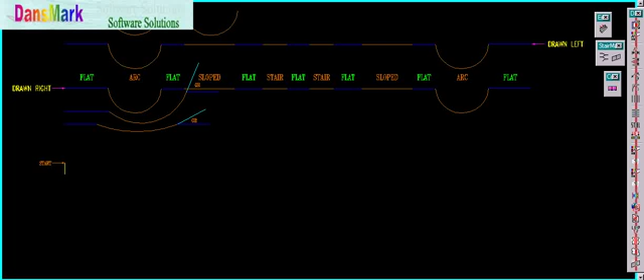This is an updated video of my new program called the New Millennium Railings. If you haven't seen the other videos, this is a spin-off of my custom railing designer and my slope railing designer. I've combined those two together and made it even more powerful than those.

So you'll be able to draw flat, arced, sloped, and stair railings in any combination. You'll also be able to do calculations for your slopes and stairs. You can pick a drawing - in other words, someone sends you a drawing, you can actually pick off of that drawing to get your rise and run from that.

On your stair portion of the program, you'll be able to place your pickets on the treads if you wanted to. You'll be able to put your pickets on the stringer edge, on a concrete edge, or on the tread itself, and you'll be able to control where on that tread you want it - in the middle, 2 inches off the very end nosing of the tread, 3 inches off. Whatever it is that you need, it will do it for you.

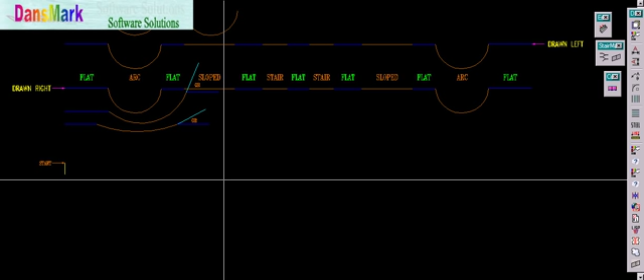Now, you'll be able to do any combination of flat, sloped, stair, and arced railings. I don't have the sloped arced railing done yet, or the stair arc railing done yet, but those I will be working on next. We'll start off with a flat, and I've already drawn these pieces out.

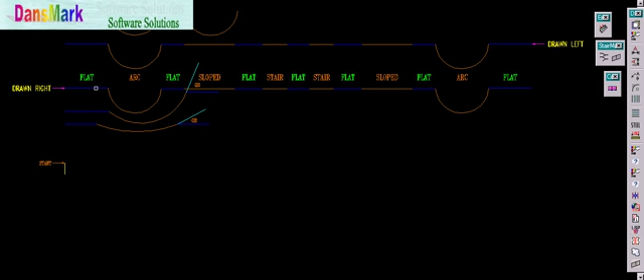So you'll be able to either enter a length or pick a line. If you draw your line from right to left, or from left to right, it's going to read that line data if that's what you want to do, or you can just enter the length of those in manually. We're going to draw this to the right. We're not going to put any dimensions on it. We're going to do another one.

And now we could either go towards me, towards you, from you, or continue straight. For this video, we're going to continue straight. The next one we're going to do is an arc. We're going to pick the arc.

We're going to do another one, continue, another flat one. Another, continue, slope. Now, it read the run from the slope. All you need to do is put in the rise.

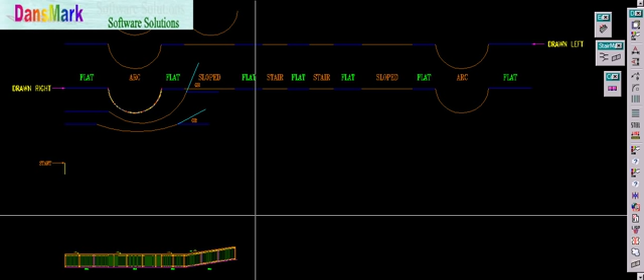And I will be creating a portion of the program that basically you'll be able to draw your plan views. I have the plan view portion of this turned off right now for the flat. I don't have the plan view done for the slopes and the stair, and that's the reason I turned it off, was just for the flat. But that will be fully functional, and you'll be able to draw your plan views out first if you want to, and then automatically do your erection and your shop drawings from that.

Let's go ahead and do another one. We're going to continue, and this is going to be flat. Another, continue, stair, and all we're going to do is either put a plus or minus because it reads the run from that line that we put in there.

And the designer, the plan view designer, will basically let you put in your rise and run and draw the line for the run portion of the calculation. You'll be able to calculate these stairs and slopes any way that you want. You just need to give me two of either A, B, C, or the angle AA or the angle BB - any two of those combinations.

And you'll be able to pick your stair information also. Let's do another one.

We'll do a flat, another stair - this time we're going to go negative. Another, continue, and flat. Another, continue, and sloped - this time we're going to put in minus 24 inches. Excuse me.

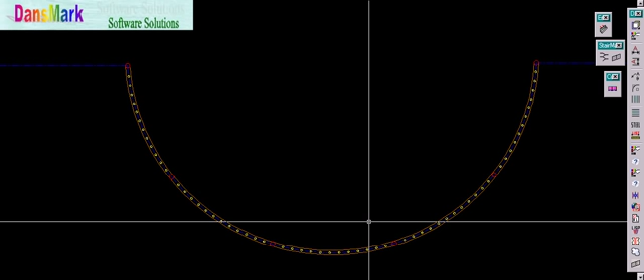Now let's go ahead and look at our arc railing for a moment. It basically lines up all your posts and pickets with the plan views. These plan views may look out of sync, but you hit regen, and it's based on your post maximum length, maximum post spacing, and maximum picket spacing. You'll be able to do any type of materials for post, pickets,

and picket rails. You'll have all the designers from the other two programs in this one. You'll also be able to set your layers, colors, and line types as defaults. And you'll be able to use your dimensions and text styles, so it'll look pretty much like your own drawings.

Now we're going to do another one. This time we'll go back to the left, just for this demo. We'll draw this about right there, and this one's going to go to the left. Another, continue, arc. Another, continue, flat. Another, continue, slope - we'll put in 24 inches for the rise.

Another, continue, a flat one again. Another, continue, and this time we're going to do a stair, drawing it positive - positive draws it upward, negative draws it downward. Another, continue, flat. Another, continue, a stair, this time drawn downward with a negative. Another, continue, flat again. Another, continue, slope - this time we'll put in negative 24, so it draws it downward.

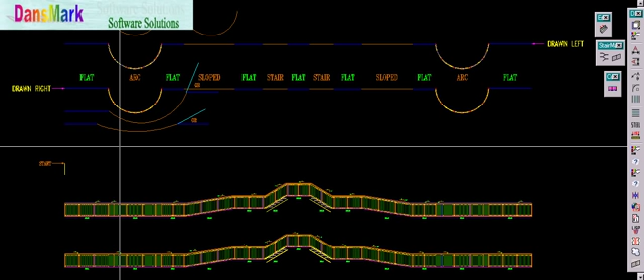Another, continue, flat. Another, continue, arced, and we'll pick the arc. Another, continue, flat, and then we're going to quit.

Now we'll zoom back out a little ways because we're going to do some of the shop drawings. With the shop drawings, you're going to pick the railings that you drew from the erection drawings. You could have put dimensions on those erection drawings if you wanted to - I just left them off.

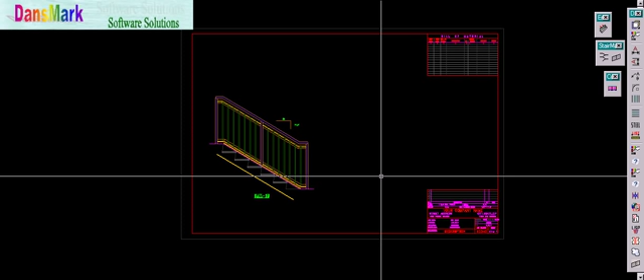We're going to do a shop drawing, and we're going to do a single. Let's pick one of those stairs. There's the shop drawing for the stair. Obviously I don't have the bill of material, the dimensions, and the section views done for this yet.

I don't have the grabrail capabilities yet, but you'll be able to do grabrails from this side, far side, and wall rails to match these on this side or far side. Sky's going to be the limit with this program when it's done.

Let's do another one, and we'll do multiples - let's just pick all of those, and there's all the shop drawings for the whole bottom section. Then we'll do another one, do multiples again, and pick all the shop drawings for the other side, and there's all the shop drawings done.

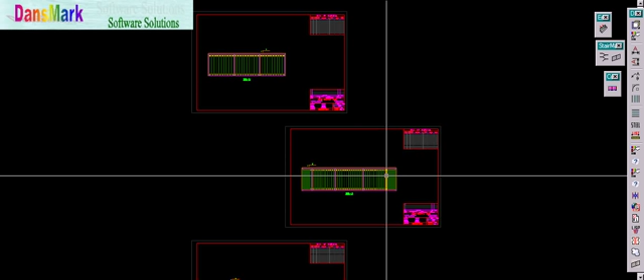They're all numbered - it numbers them automatically. You'll be able to control the name and number for these railings, you can do them however you like. You'll also be able to save, edit, and delete the data.

Let's look at one of the arc railings. Now, I don't have the plan view with it at this time. I've just got it to this point where I could draw the arc railings in line with the flat, sloped, and stair railings. You can do any combination.

Once you put in your title blocks, you put in your A size, B size, C size, D's, E's, and F's, your paper space tabs if you use those. Once you get that done, whatever you're using at that particular time becomes default. So you'll be able to do all these drawings in A portrait, A landscape, B portrait, B landscape, C portrait or landscape. D is only landscape, E and F will only be landscape. C may only be landscape also, as a matter of fact, because I just don't remember if I have those capabilities in that title border program.

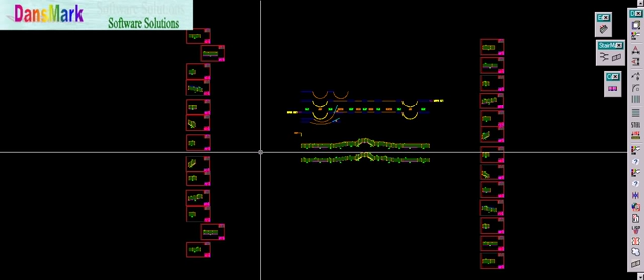This is going to be an exciting program. You'll be able to do almost anything that you need with this program. It's looking pretty good to me so far. I don't know how it looks to you. Thanks.